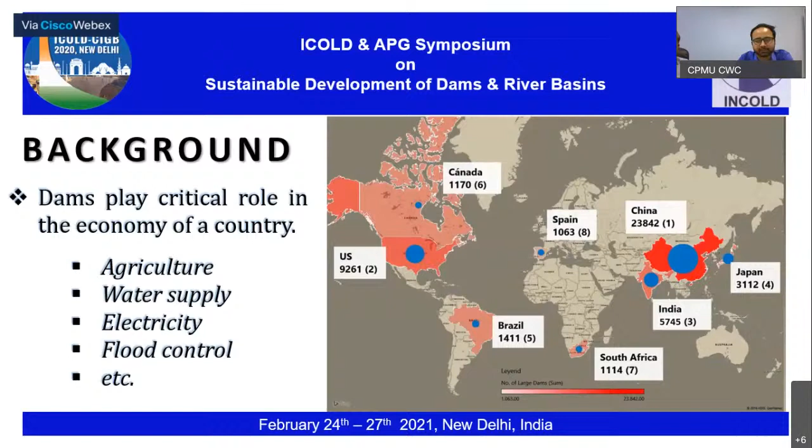From the Indian perspective, if we see the age of the dams, of these 5,700 dams, more than 25 years of age accounts for about 4,180 dams, out of which about 1,200 dams are greater than 50 years of age. So in addition to this aging, deferred maintenance, and deficiency in design practices, our dams have been facing a multitude of dam safety issues like hydrological safety, structural safety, and operational safety.

Keeping this fact in view, this DRIP program was initiated in the year 2012, as sir already told, in which the portfolio of 223 dams are there, and in this portfolio 89% are older than 25 years and 25% older than 50 years of age.

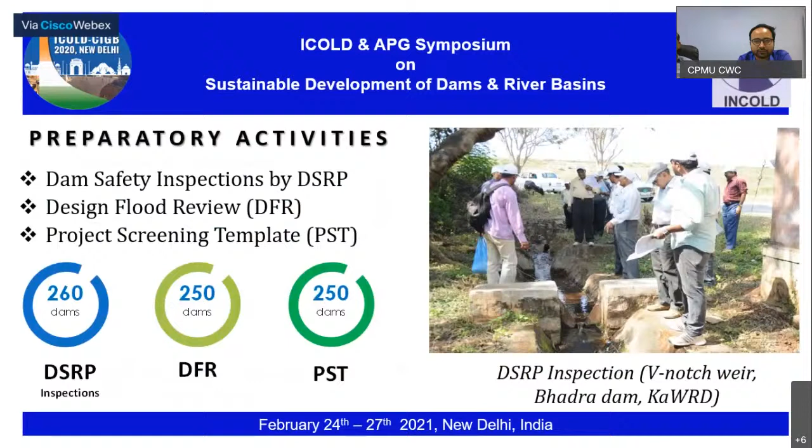These are some of our observations while carrying out the design flood review of 203 dams. Why 203 dams? Because some of them are saddle dams and have a common reservoir. We have observed that about 33, or 16%, of dams have no increase in design flood, and about 54% have less than 0 to 50% increase.

And 47 dams have 50 to 100% increase. Based on the design flood, we did the flood routing studies also, and we found that more than 51% of the dams have no sufficient freeboard availability.

To address this in a very holistic manner, this design flood review, and accordingly the ability of the dam to cater to dam safety, we carried out the hydrological safety activities like raising of dam height, parapet wall, additional spillway, desiltation of reservoir, and repair of spillway and conveyance system. So this we did for 171 dams.

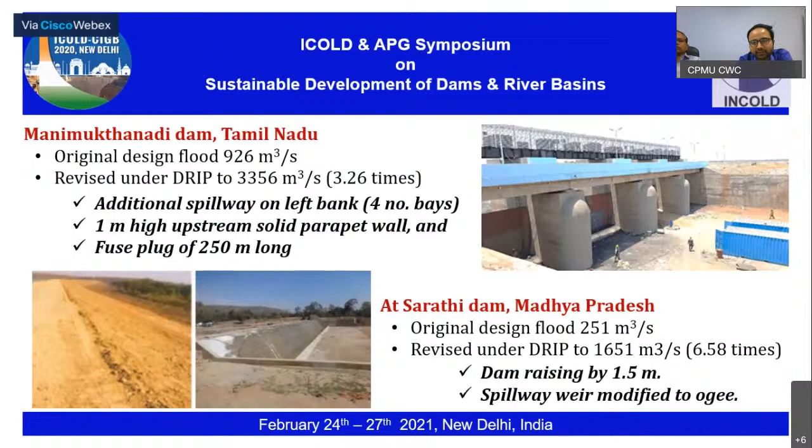Now, coming to the stability aspect, we did it for 164 dams, which included backing concrete, embankment and slope protection, dam resectioning, and etc.

In the seepage control, work was done for 71 dams, out of which joint treatment and grouting and geomembrane is the major activity which we did for addressing the seepage issues.

These are some of the examples, like Porthimund Dam in Tamil Nadu and Servalar Dam in Tamil Nadu. We did upstream face racking and pointing in Porthimund Dam, and at Servalar Dam we did the geomembrane and also raking and pointing at the joint treatment for addressing the seepage issue.

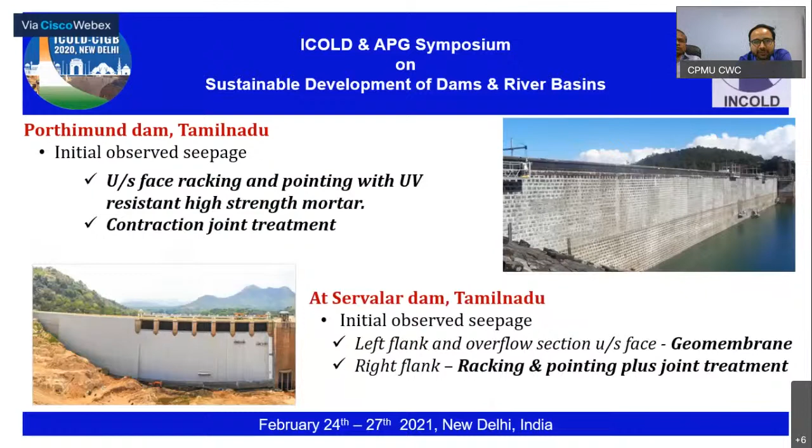In addition to this physical rehabilitation, we also looked into improving basic facilities like public facility, providing standby generators, gallery lighting, and surveillance equipment, instrumentation, and all. So this was done for 178 dams.

Third-party construction supervision and quality control is considered very important for ensuring high quality of works and also ensuring compliance to the contractual requirements. Under DRIP, we have 3 levels of third-party construction supervision. The first is looked after by the contractor who does the execution. Second is looked after by the SPMU who look after day-to-day activity, and third is from the central project management unit who are supported by the team of consultants.

In these 9 years, we did about 1,092 construction site visits. If you can see, in 2017 it was the highest because the project picked up during those years. And we also did some quality control testing, material testing for 605 numbers of samples.

In addition to physical rehabilitation activity, we are also doing some soft activities like preparation of emergency action plan and operation and maintenance manual. Globally, these two protocols are very important, especially before the initial filling of reservoirs.

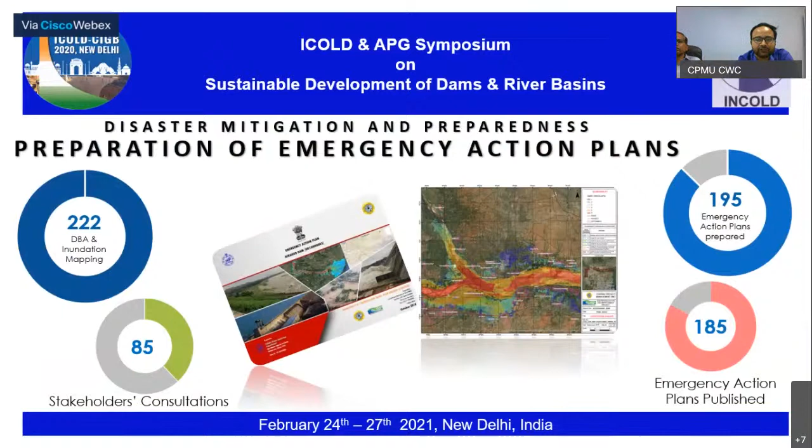Operation and maintenance constitutes two things: operation part and maintenance part. Under this DRIP, 203 manuals have already been prepared and 146 have been published. We also provided support to the states for preparing model documents, like the operation and maintenance manual for Maithon Dam and for Almatti Dam.

Guidelines and manuals are considered important pillars in dam safety management. Every state has different dam safety practices, so as the central agency or central project management unit, for standardization and uniformity, we prepared these guidelines and manuals. Out of 14, we have already published 11.

DHARMA is a web-based dam asset management tool for capturing important dam health information for long-term sustainability. We have captured almost 5,000 dams' data, about 1,000 users are actively using this, and licenses have been issued to about 18 states.

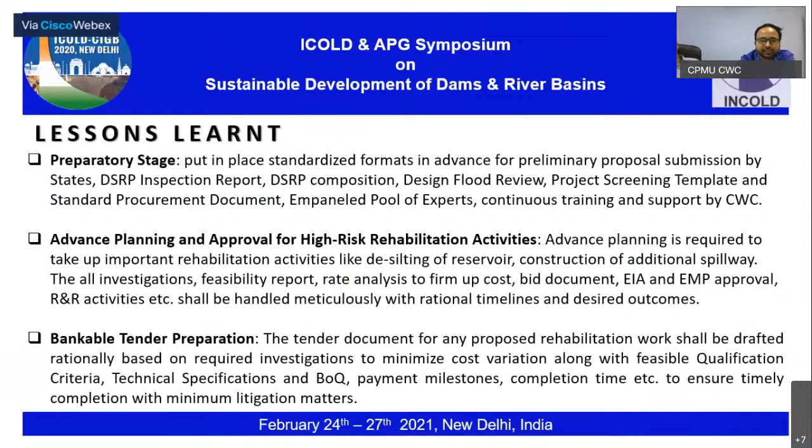Fourth is the CS and QA activities, which we are already doing in DRIP and also scaling up in DRIP phase 2. There's already a three-level CS and QA mechanism in place.

Fifth is the monitoring mechanism - each agency should have the right kind of monitoring mechanism so that activity can be monitored and corrective actions can be taken on a timely basis.

Sixth is adequate delegation of power. What we observed is that there is no adequate delegation of power in the states, so we recommend that there should be adequate delegation.

Seventh is resource identification and assignment, because in high-end technical activities like dam break analysis and inundation mapping, dam owners are not having enough capability. So we should have a competent technical group of expertise and training activity for these things.

Contract management experience includes dealing with contract management - we shall have adequate experience of contract management, otherwise it will invite matters related to undue delay in the technical and financial evaluation of the contract award.

We should also have appropriate capacity building, and all agencies must give due weightage to various kinds of trainings for their staff and officials.

The last point is quality human resources in the State Project Management Unit, because SPMUs are the single window arrangement at state level. They must have competent officials with an adequate number of years of service left before retirement, so that they can carry forward the institutional memory to ensure implementation of the scheme.

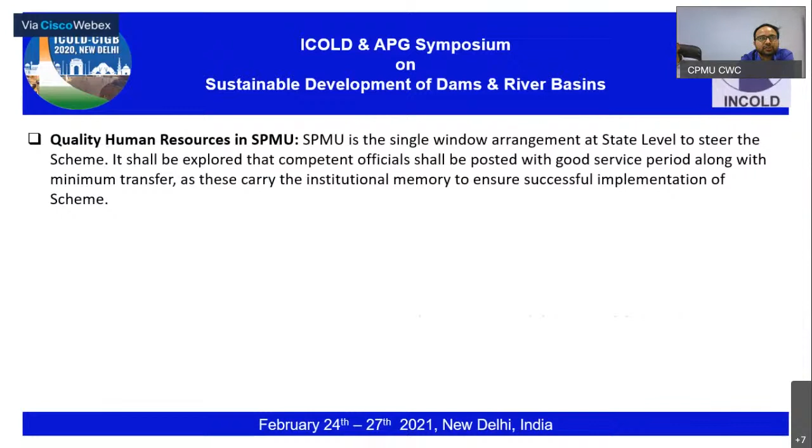With this, I want to thank the chair.

Yes, Sarab, I think - so listening currently. Okay. Yes.

I just wanted to mention that the presentation was very comprehensive, and probably when you put all that together from outside your day-by-day activities, you should feel impressed with yourselves. The world, as I have talked about, is looking at your example, particularly in the region, but not only there. You are putting forward a path that the world will really appreciate. Let me check the chat if there's a direct question - I don't see one, but if not, I would like both of you, or whoever wants, to respond.

Beyond the statistics, what makes you most proud of what you have done till today? If you had to name one thing from what you have achieved, what is it that makes you proud?

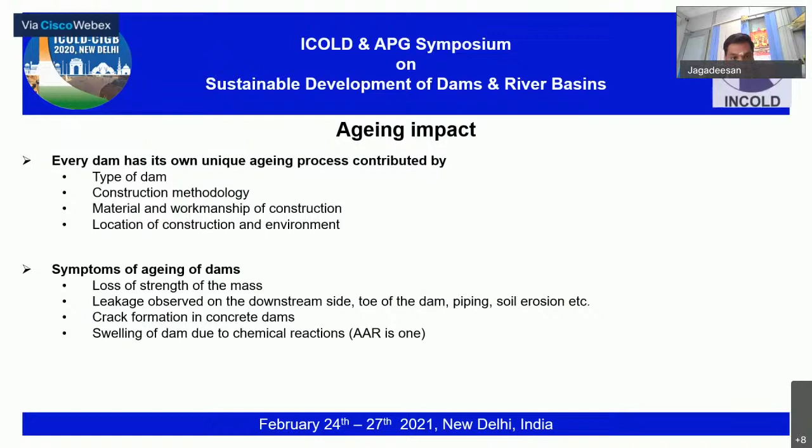So let's quickly get into what a geomembrane is. Geomembranes are nothing but a thin flexible material with very low permeability. They are highly flexible, durable, and provide efficient water tightness, and are able to accommodate settlements.

They can elongate with earthquake movements, and they can be installed quickly even underwater - that is a very important aspect. It is completely environment friendly, easily monitored, with no maintenance or less maintenance. It increases the longevity of hydraulic structures, thereby increasing the safety of the entire environment. And finally, when effectively designed, it is completely cost effective.

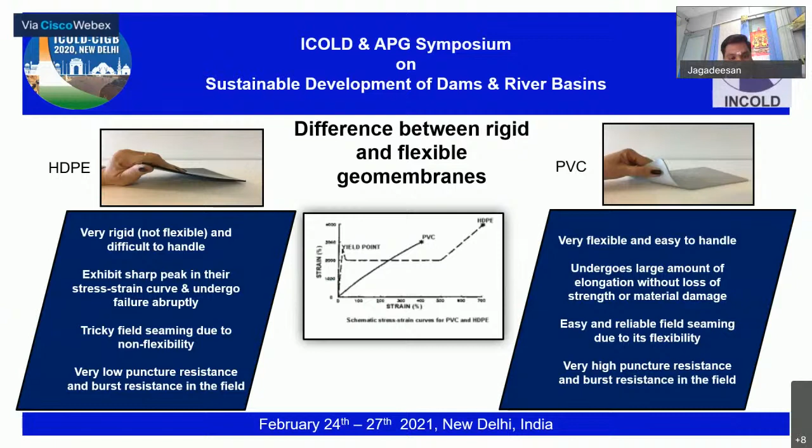Field seaming is very tricky in HDPE, whereas it is very easy for PVC membrane. HDPE has very low puncture resistance and burst resistance in the field, whereas PVC membrane has very high puncture resistance and burst resistance in the field. These are various parameters which help us design why PVC is the most preferred in hydraulic applications.

We will quickly get into three case studies of experience in India. First is the Kadamparai Dam, second is the Servalar Dam - thanks to DRIP for giving us this first dam project in India - and the second DRIP project is Upper Bhavani Dam.

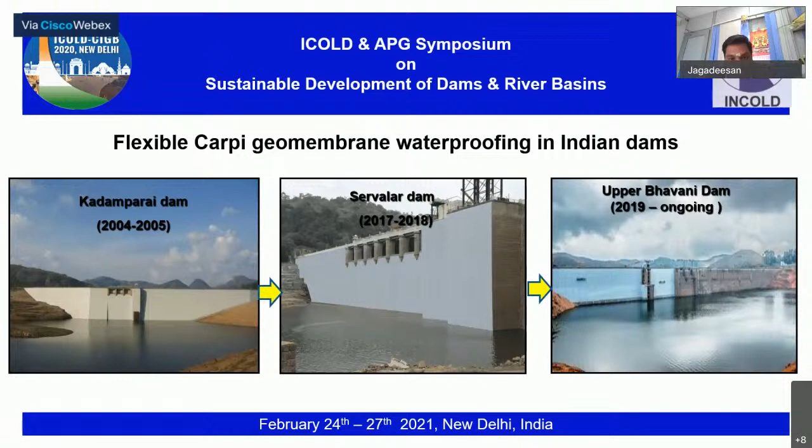So first case study, Kadamparai Dam. It's a stone masonry dam owned by TANGEDCO, and this is the first dam to be rehabilitated with PVC membrane in India. Quickly into the history of Kadamparai Dam: it's a stone masonry dam of 67 meters high, 478 meters length, completed in 1984, and it is a pump storage scheme of 400 megawatts.

The problem with this dam is, since its first impoundment, there was seepage experienced of 1120 LPM recorded in the first impoundment. The problem continued, and the seepage inside the gallery kept increasing well beyond the permissible limit. At one point the dam owner could not fill the dam beyond 70% of the FRL, and they were losing huge amounts of power generation - less than 220 megawatt was being generated - because they had a fear that the dam could lead to serious consequences if filled beyond 70% of the FRL level.

And you can see the water that is gushing inside the gallery. The client also did not leave it as it was.

They did try a lot of repair methods that were very much prevalent at that point of time. From 1990s, they tried drilling and grouting, packing at several locations, and racking of the joints with cement, filling it with cement mortar. But unfortunately, all these efforts gave them only a short-term solution of 2 or 3 years, and the leakage kept on increasing.

In 2003, the leakage touched a point of 38,000 LPM, and that was only through the gallery, at almost 10 meters below the FRL level.

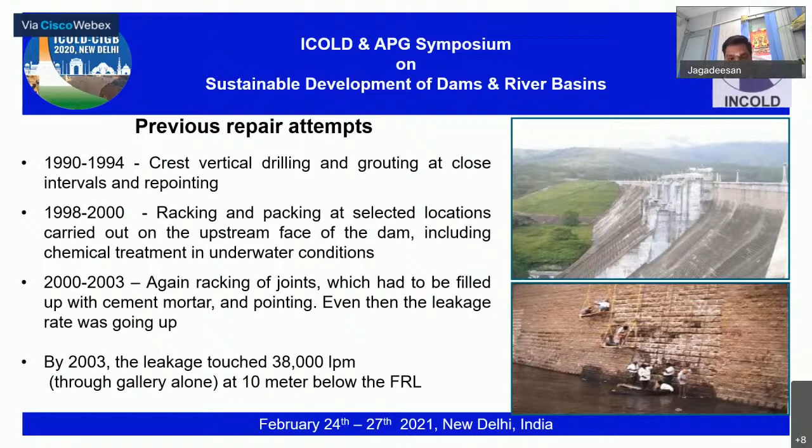It was at this point the client had got in touch with Carpi through some international conferences. Carpi made a site visit and proposed a solution, which was immediately accepted by the client. It all happened in a very short span of 6 months, and finally Carpi took over the site in 2004, and we started with the preparatory works.

Installation was performed from special traveling platforms, and the geomembrane work started in the middle of January 2005.

Let's get into the technical aspects. A geomembrane waterproofing system doesn't end up with a single material geocomposite. There are so many elements that define the system, and that is why we always call it a waterproofing system and not a material. There is an anti-puncture layer called a geotextile, a drainage layer called a geonet, an anchorage element we call the tensioning profile, and finally the geocomposite. All combined together is called a system.

A detailed section of the tensioning profile, which is a key element, is drawn over here. There are 3 major elements: a lower profile that is fixed to the dam body, a geomembrane that is rolled from top till bottom, and finally the upper profile.

This key element in fixation of the geomembrane is commonly available in the market, but the key lies in how you anchor and fix it to the dam surface, so that it lasts for the duration of the warranty as well as the life.

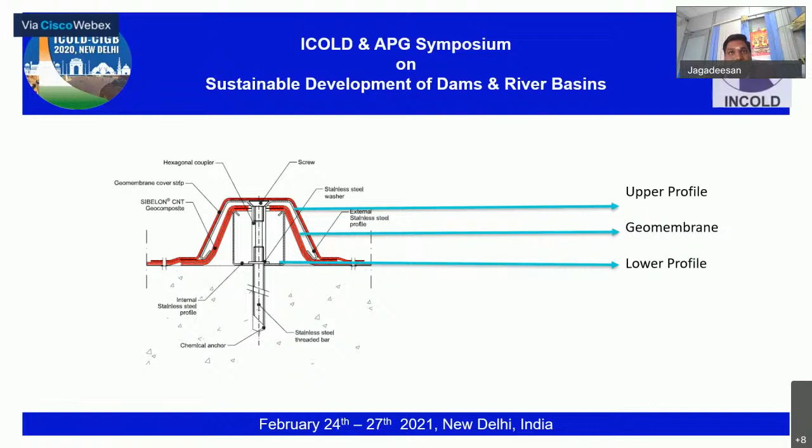Then a highly permeable, non-compressible geonet was placed along the perimeter seal to collect rainwater and convey it to the discharge point to the gallery. Then a thick layer of 2000 GSM geotextile is installed on the upstream face.

Kadamparai being a stone masonry dam, there are stone protrusions of more than 2 inches, and we have to make sure these protrusions do not disturb the geocomposite. So we went in for a thick geotextile layer installed from the top of the dam till the bottom.

One more important thing is, way back in 2004 itself, we conceptualized the instrumentation that is required, and that was the reason we installed optical fiber cable behind the geomembrane to monitor its efficiency even for multiple decades. The OFC cables are installed along the periphery, and the ends are taken to the crest and connected to dedicated boxes.

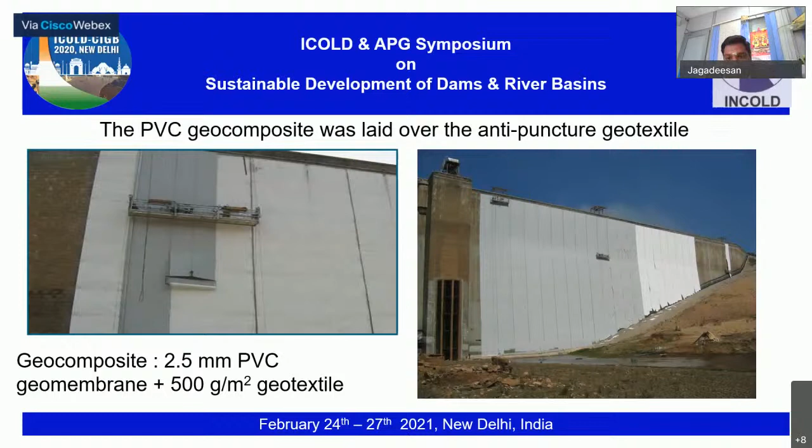Finally, after installation of the lower profile and the geotextile, comes the main element, the PVC geocomposite. The composite we use is a 2.5 mm PVC heat coupled with a 500 GSM geotextile. You can see the gray one that has been installed from the top of the dam till the bottom.

Then comes the next tensioning profile, the top profile. Once the lower profile is fixed, the geocomposite is rolled, and finally the top profile comes. After welding all the composite panels together, the external profiles are placed over the geocomposites and connected to the lower profiles. The tightening should be done so there is no excess tightness that tears the membrane, but at the same time it should not be too loose so it does not form wrinkles. That is where the experience of key technicians comes into picture.

And finally, after all the installation is completed, we terminated all these membranes at the bottom using a watertight perimeter seal. The watertight perimeter seal is covered using resins, gaskets, and bedding mortars. And this is the key element, that is how we discharge the water behind the membrane.

As I said earlier, the biggest plus of this system is this is the only waterproofing system which has a drainage layer incorporated, meaning if there is any kind of water entry inside the dam body, we ensure that the water is properly conveyed into the gallery and it does not allow entry into the downstream side or the body of the dam. So you can see these are the drainage discharge pipes that are installed from the upstream of the dam to the gallery.

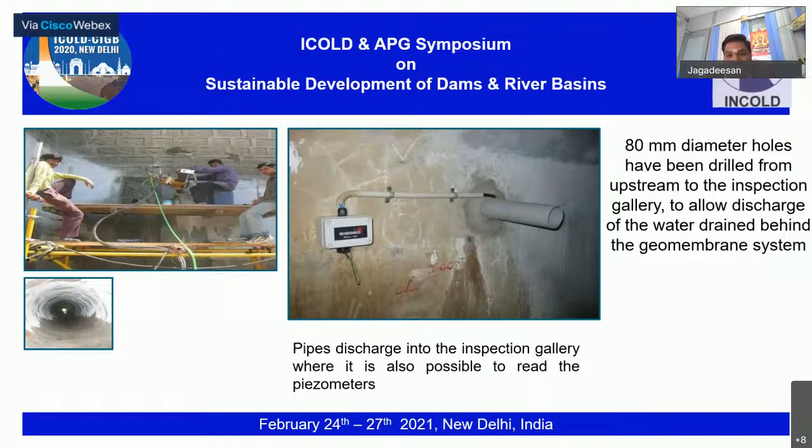Finally, the entire installation covering more than 17,000 square meters, including the monitoring system, was completed in 3 months, which was 6 weeks ahead of schedule. In fact, for the first time in the history of TANGEDCO, they had paid a compensation of 51,000 euros in 2003 for early completion and for handing over the dam much ahead of time, so that they could begin the generation ahead.

Finally, after all the installation, the entire dam leakage was brought down to 80 liters per minute, which is close to 99.8% reduction in leakage. You can see how the dam looks like before geomembrane and after geomembrane - a completely dry gallery.

And for the success of the project, Carpi was awarded the India Power Award in 2008. The award was received by our chairman, Mr. Alberto M. Scuero. This is a photograph of Kadamparai Dam taken in 2018, almost 13 years after the installation. Till now, the leakage is around 100 liters, which is marginally more than what we left, and which is still well below the permissible limit.

Let's quickly get into the next case study, that is the first dam project of DRIP, Servalar Dam. This is a stone masonry dam located in Tirunelveli district in Tamil Nadu. The dam also belongs to TANGEDCO, and has a multi-purpose functionality. Majority of the dam's purpose is for irrigation, and the power house is run based on the water needs on the downstream side.

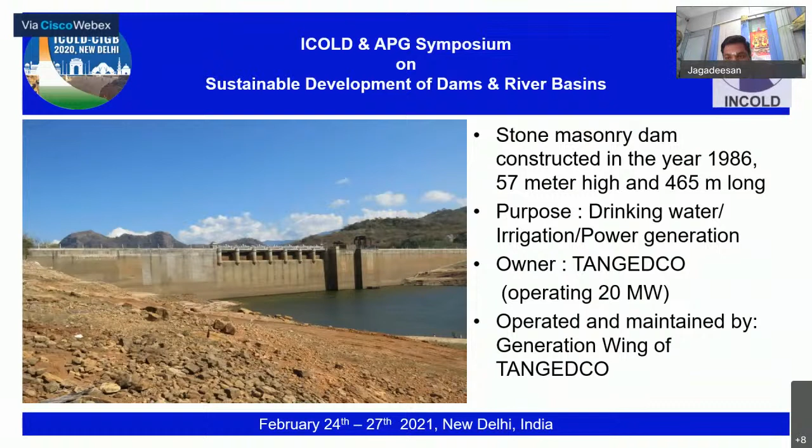The major purpose is drinking water and power generation only for a seasonal duration. This was also constructed in the year 1986. It's a 57-meter high dam and 465-meter long, and it is operated and maintained by TANGEDCO.

I have a video to run. I'm not sure if it runs over here. Okay, let me go to the video and then I'll get back again. Can you see the video running? No, we still see a gray screen. It looks like maybe now. No. Okay, just a minute. Jagadeesan, it's not running. You can, I think, tell salient facts to the audience. Okay. You're wasting your time. Okay, I'll go to the video at the end of the session. Maybe by then I'll be able to locate the problem. Can you see the screen now again?

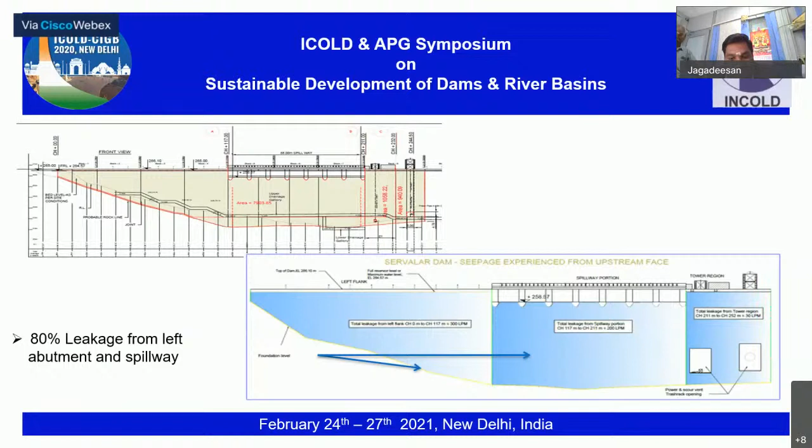When you talk about the challenges we faced during execution, the dam is located on a perennial river, which was a very, very challenging job, and we had to do a lot of desilting and dewatering works. Unfortunately, this dam region is located in a locality where it rains for almost 11 months out of 12 months. So you can imagine how difficult it was to do the desilting and dewatering works. The reason for doing desilting and dewatering works is we need to install the membrane as deep as possible, close to the foundation.

Another biggest challenge was the non-availability of as-built drawings, and unfortunately many dam owners do not have these as-built drawings, so there were a lot of surprises when we started excavating. There was a lot of delay in dam depletion, and there were several structures which were not in the drawing earlier.

This dam is located in a windy location, where wind speeds of up to 75 km per hour were blowing, and you can imagine the risk involved when installing the membrane. You can see the platforms that were installed and used.

I want to make a comparison between Kadamparai and Servolar. Kadamparai was the first project for Carpi, so we did not take any risk and imported all the materials. Now in Servalar we have become completely indigenized, and all the platforms are locally made.

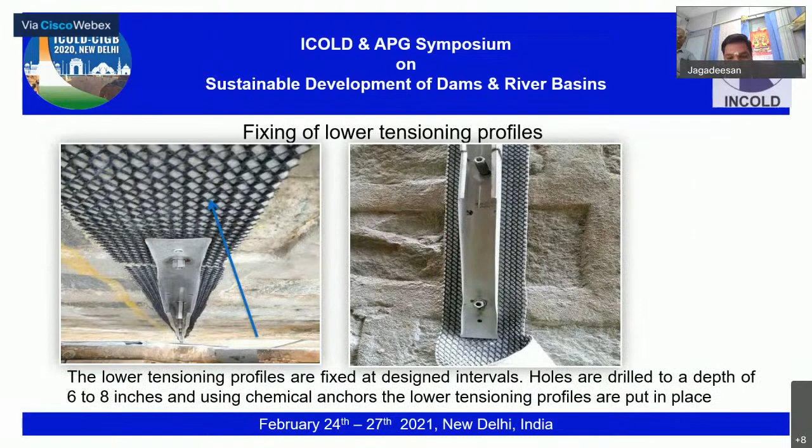We can see the geomembrane installation started in Servalar: fixation of the top seal, fixation of the lower tensioning profiles. They have been fixed at regular intervals, and holes are drilled to a depth of 6 to 8 inches using chemical anchors, and they are put in place.

Then a geotextile is applied. This is also stone masonry, and a lot of protrusions were observed, so we had to use a geotextile of 2000 GSM.

Then the geocomposite, which is 2.5 mm, was installed from the top of the dam. You can see on the left the geocomposite being rolled from the top, and the installers on the platform. Adjacent sheets of geocomposite, of 2.1 meter width, are rolled out, and the connections are joined by hot air seaming.

Once all the rolls are unrolled, there is a lower profile. For the upper profile, we don't leave any stainless steel exposed; we cover even the upper profile with a cover strip. So from the outside, it looks like a pure gray material lying there.

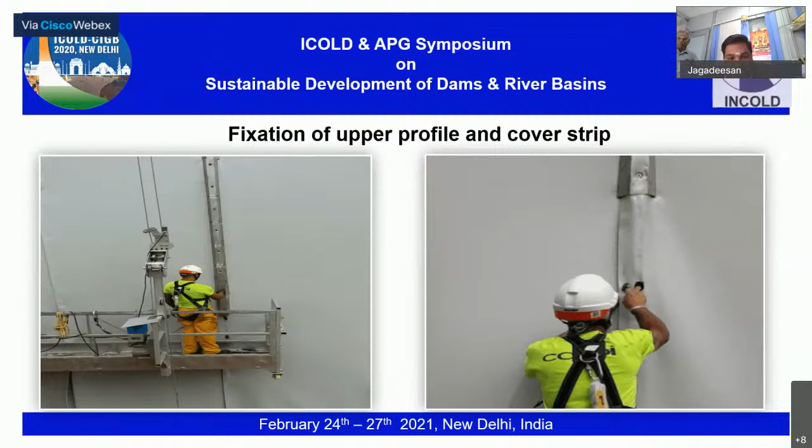Finally, a quality check is performed. You can see a seam check, torque check, and welding check being carried out.

After installation of the system, you can see the difference. Within one season, a completely wet downstream has become completely dry. You can see the drop in leakage — the leakage measured in the gallery was around 800, but the downstream leakage was never measured and was close to 4,000 to 5,000 liters. Now there is hardly any leakage.

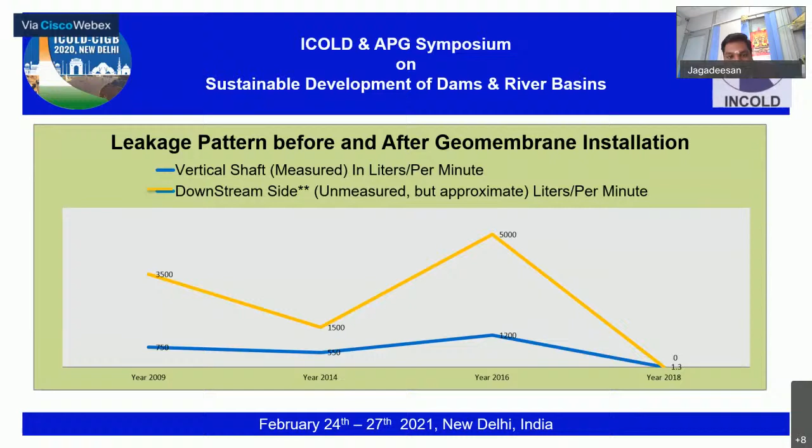Let's quickly cover this in another two minutes so I can wind up the presentation. The next job is currently in progress. We have completed almost 60% of it, and due to COVID the project had to be extended to this season. This is a very huge dam, 82 meters high and 426 meters long, and it's the second dam project under DRIP.

You can see this leakage is almost on par with Kadamparai. The leakage measured was around 8,000 liters at close to 9 meters below FRL level, and as per calculation, if it fills to the top level, the leakage would easily exceed 18,000 liters per minute. Unfortunately, this dam was declared a distress dam back in 2005, but the client could not take a decision on conclusive repair work, and finally DRIP came to the help of TANGEDCO.

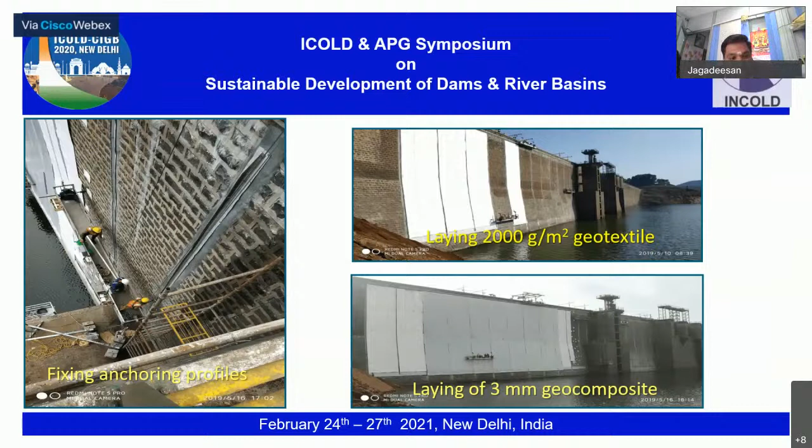The only difference between this and the previous projects is that since the head of water is high, we had to use a thicker geocomposite, 3 mm. One more additional element we included here is an optical fiber cable.

Like we did at Kadamparai Dam, the optical fiber cable was installed along the periphery of the dam behind the geocomposite. This is to monitor the performance of the geomembrane over decades. Since we give a life of 70 years, we need to ensure the performance of the geocomposite remains intact.

This is the protocol that Carpi follows in all our projects. This is a photograph of Upper Bhavani Dam after completion of the first two phases. The third phase is in progress, and hopefully by June we should be able to complete the entire work.

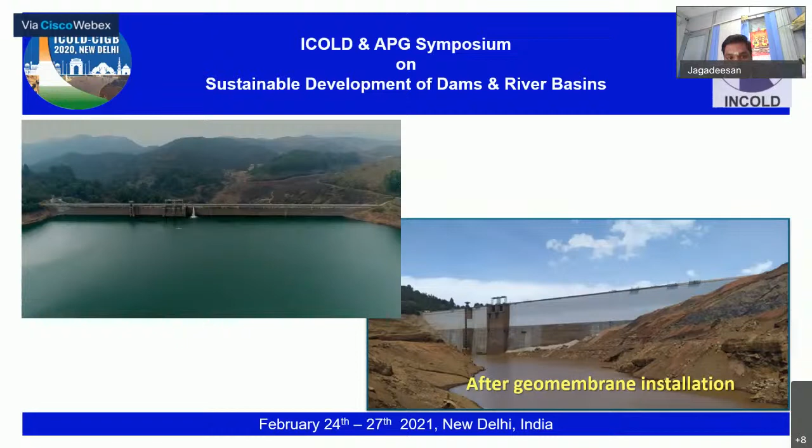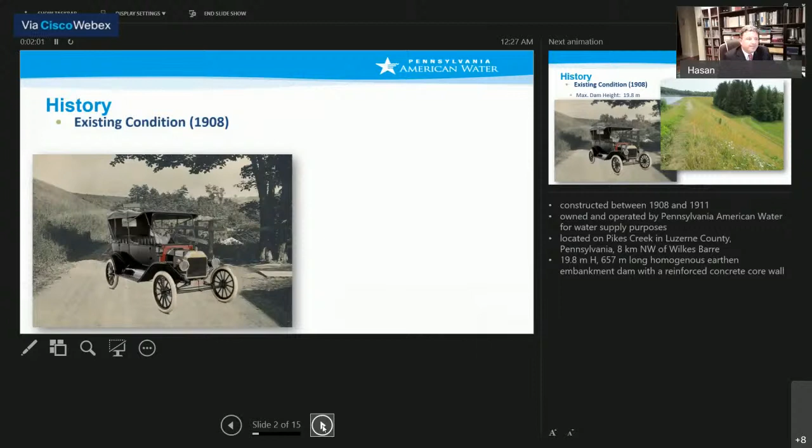The dam is composed of a homogeneous embankment, which is 657 meters long and about 20 meters tall, and there is a reinforced concrete core wall in the middle.

Here we can see some additional photos. The dam has upstream and downstream slopes of 2 to 1.

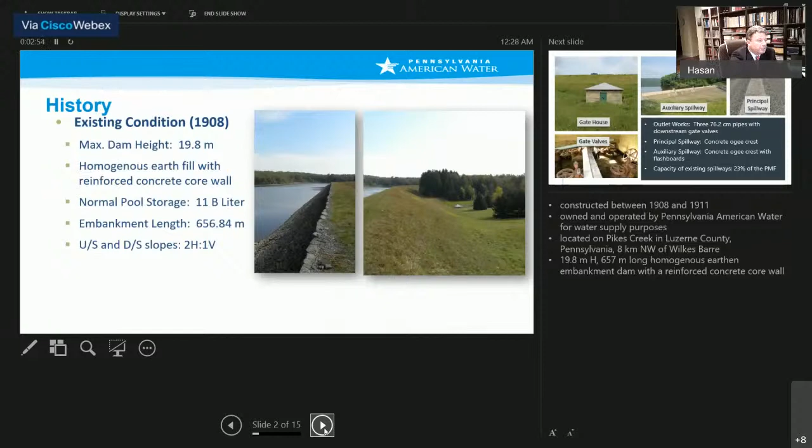And here are some information about the other structures of the dam. We have the outlet works, which is composed of 3 pipes having a diameter of 76.2 centimeters, and it also includes downstream gate valves. The principal spillway is a concrete ogee free overflow spillway, and the auxiliary spillway, which you can see in the middle of the photo, is also a free overflow spillway. There is an ogee crest, and there were steel flashboards, which open manually when there is a major flood. The capacity of both of the spillways was 23% of the PMF.

And the problem with the dam was that it's located in an area where there are a lot of people living downstream, and failure of this dam would cause significant economic damages and also loss of life. So after evaluation of the hydrology, it was decided that the design flood requirement had to be full PMF, so we needed to increase the capacity of the spillways.

And while doing that, we had some requirements. We couldn't, for example, increase the dam embankment. We couldn't increase the maximum water level. We couldn't increase the outflows up to 100-year floods because there are many structures at the downstream of the dam. Since this is the water supply dam, we can see the office buildings as well as the water treatment plants at the downstream.

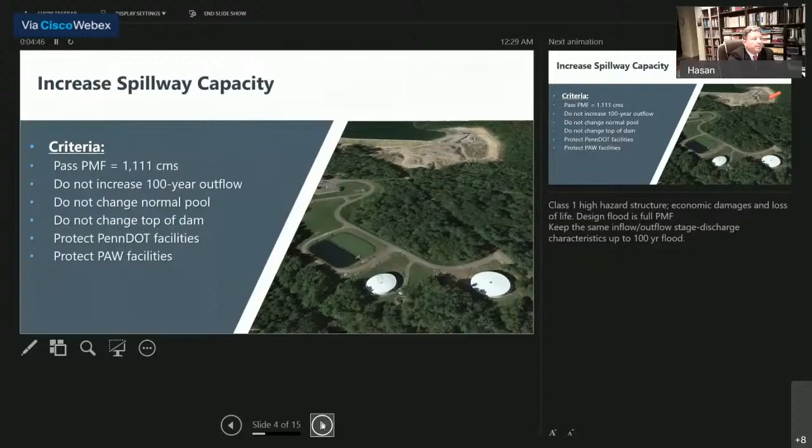We also have a bridge that is connected to, that is under the highway that is running nearby. So we had to protect all these structures while rehabilitating this dam in order to meet the new PMF requirement.

So we see all these structures. For the rehabilitation works, we couldn't do any widening on the main spillway because it was difficult to do any modifications with the topography, and also it wasn't possible to make major changes at the road downstream as well as the bridge.

Some repairs had to be done on the spillway because there were a lot of concrete damages at the base, at the chute, which had to be repaired. Also during a high flow, the water was overspilling from the left side of the wall, which had to be raised. So at the end, the majority of the rehabilitation was focusing on the auxiliary spillway.

We had to increase the capacity from 392 CMS to about 1100 CMS.

So in order to do the rehabilitation, there were several alternatives developed. To start with, it wasn't possible to consider flashboards and earthen fuse plugs, which are not allowed in the state of Pennsylvania by the Dam Safety Regulatory Agency because of reliability issues. Also using mechanical gates were not encouraged because it requires human intervention. There are mechanical and electrical systems involved, which might fail during very large floods, and also a potential for misoperation during very large floods.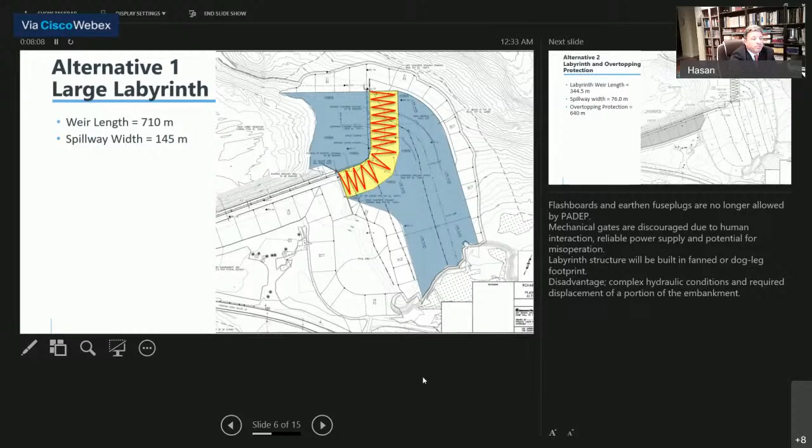So this alternative had a lot of disadvantages. First of all, you don't want to mess with the existing dam embankment. It's not an ideal situation to try to take some space from there, which also causes the project to be very expensive. And for the routing of the flood, this alternative also created a lot of complex hydraulic conditions. So this alternative was eliminated.

The second alternative was keeping the same footprint of the spillway and constructing another fixed labyrinth weir, which would pass about 50% of the PMF. And then the remaining 50% of the PMF would go through the dam embankment by creating an RCC or similar system for doing overtopping protection.

So reminding you about the dam embankment, it's a 640 meters long structure. So basically you're trying to create a spillway throughout this entire dam embankment. The flood will be discharged not only through the spillway, but also through the entire dam embankment.

So this alternative was also eliminated because of the costly and, most importantly, hydraulic constraints, because you couldn't discharge all that water, which would inundate the downstream roads.

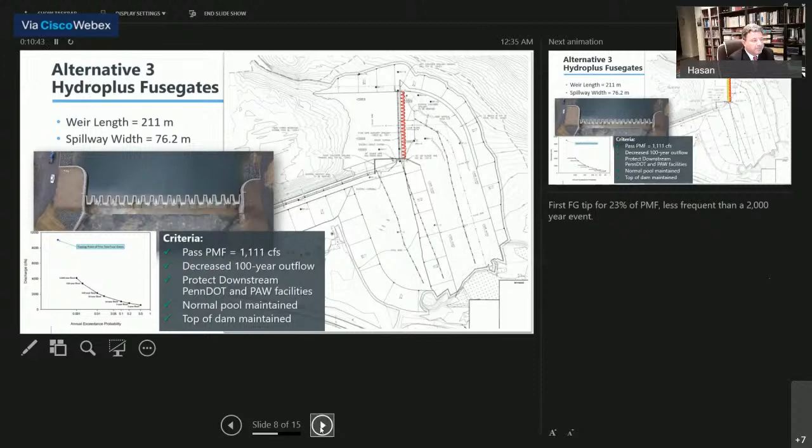So for those of you who are not familiar with the Fusegate system, here is some information. Fuse gates are freestanding blocks made of steel or concrete set on a spillway sill, and they form a watertight barrier. We put these gates side by side on a broad crested weir, and put EPDM seals in between, and also between the spillway sill and the fuse gates, in order to create a watertight barrier.

When there is an exceptional flood, which we can predict, because each inlet well of the fuse gates is set at a different elevation designed in the beginning, when the water level reaches this elevation, it will start filling the inlet well and fill up the chamber. At this point, the discharge capacity of the drain hole is not able to cope with all the incoming flows.

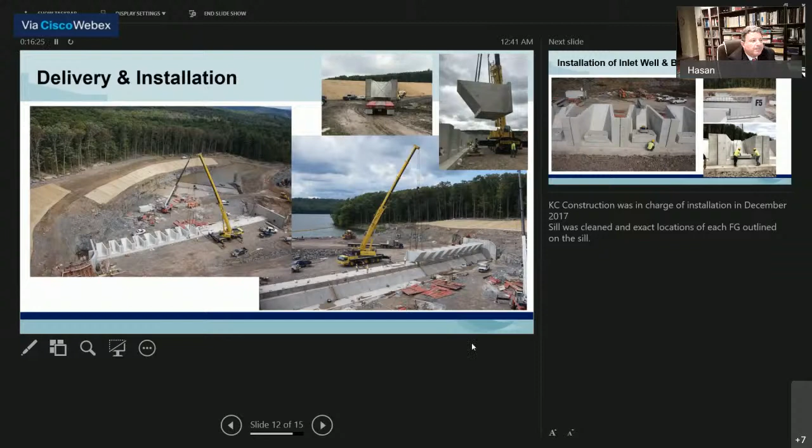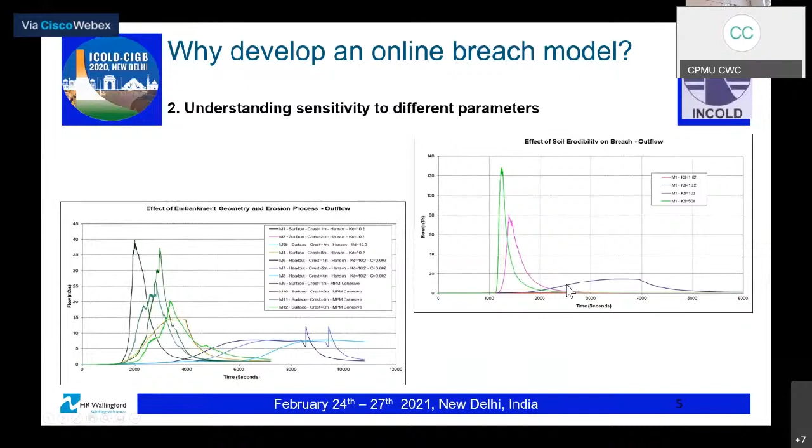So it's important to understand when and how these processes occur. Understanding the sensitivity of breach prediction to different parameters, such as your dam or levee geometry, or your soil erodibility, is equally important. The plot on the right here shows different hydrographs that could occur for a simple homogeneous structure with different types of soil. And finally, thinking about uncertainty and understanding that it's present, and the magnitude of uncertainty in relation to the end application is particularly important. Some end users, it will not be so significant, but for others, it could be very significant. So users should understand why they're doing the prediction and how their data will be subsequently used.

The model integrates analysis of hydraulics and erosion and structure response. It aims for a similar level of complexity in its analysis of these different aspects to give you the overall breach prediction. So the EMBREA model is not calibrated to specific data, so it does not reproduce a specific example or case study, but it is validated against a wide range of data so that its performance falls within a range for a variety of different structure types and scenarios.

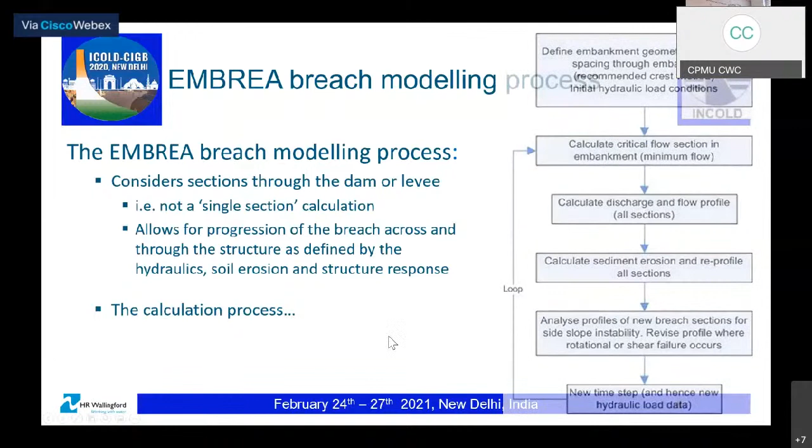I mentioned that the model checks section by section and looks at side slope stability and block failure. It does this by considering the erosion around the section through the breach, and then considers block instability at each time step for rotational block failure or shear slip failure.

If you have a core to your dam or levee, it looks at the stability of this in a similar way. As the supporting fill material is eroded and the core becomes more exposed, it checks to see when failure may occur with that core.

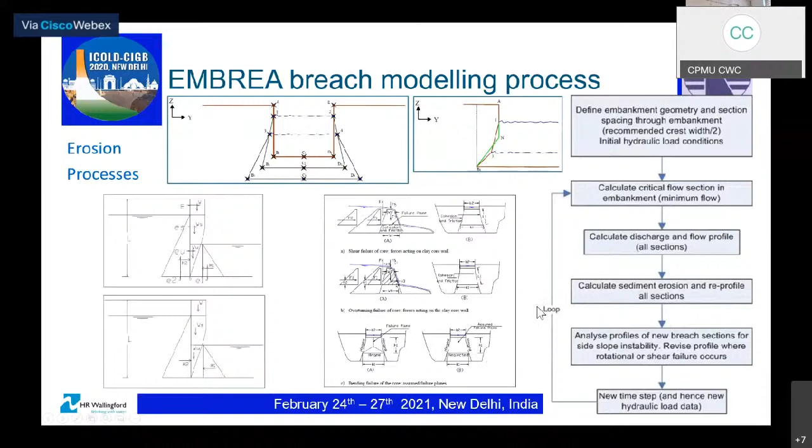So how does EMBREA Web differ from EMBREA? It's not different—it's simply an online version of the EMBREA model. Because it's an online version, the simulation takes place on a server based at HR Wallingford in the UK, so no software download is required.

To gain access, you need to register, and then there are two versions you can use: EMBREA Lite, which has free access as a free version, or EMBREA Pro, which has more functionality and paid access.

If you wish to access those models, the web address is shown there, and you have a choice of these two options. I've got a slide later on which goes into more detail about the differences between EMBREA Pro and EMBREA Lite, so we'll come back to that.

What do you find when you log in? First of all, this is the EMBREA Pro homepage. You'll see various data entry screens, and on the far right-hand side, the settings screen.

If you go to the settings screen, this allows you to load previous files or to save setup files so that you don't have to re-enter the data every time.

If we then work through data sheet by data sheet, under the failure sheet you get to choose whether it's overtopping, head cut, or piping. You can define your structure type as homogeneous, layered, or a core structure with spillways and outlets, with downstream face protection and so on.

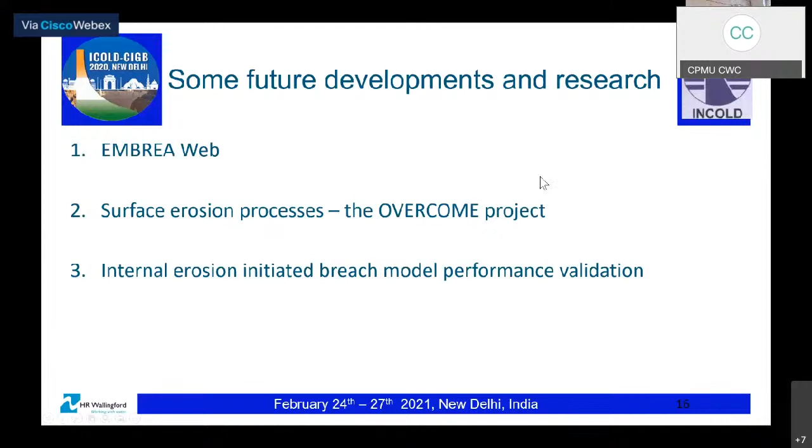Okay, so that was a quick overview of EMBREA, EMBREA Lite, and EMBREA Pro. To wrap up, I've got some slides on future developments and research related to the model. Fundamentally, we've continued over the last two decades to implement various research projects to improve our understanding of breaching processes, and that knowledge then feeds into the models.

So we will continue to update the functionality of EMBREA as the knowledge continues to evolve and advance. In the near future, we expect to update the user interface by simplifying it, and we also expect to include erosion below foundation level as an added functionality. In the long term, we intend to add guidance on soil erodibility and updated guidance on transitions between head cut and surface erosion, and when to use each of these different processes.

So then two final projects to wrap up. One is the Overcome project. This is the creation of a field test facility, large-scale breach tests in Spain. The project has a combination of laboratory tests, field tests, and numerical analysis. The laboratory tests are undertaken at UPM in Madrid to a scale of 1 meter, and the field test facility allows tests to a scale of 2.5 meter full section profiles. The objective here is to investigate both macro erosion processes and micro erosion processes.

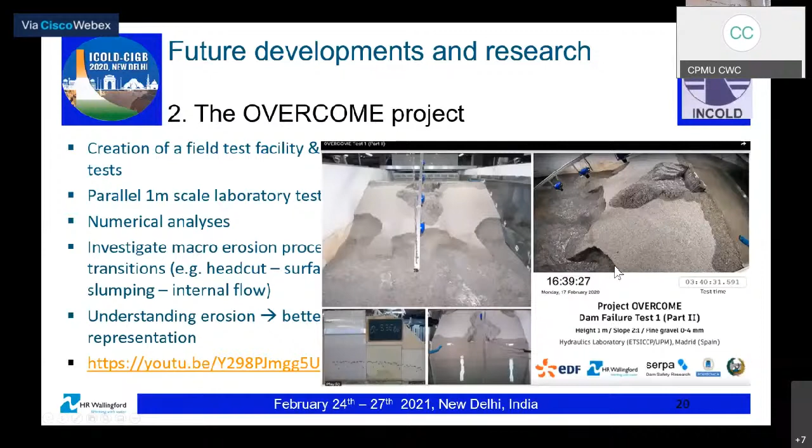The final project I want to mention is EDF-funded work looking at internal erosion initiated breach models. We're comparing, in much the same way as we did for the Dam Safety Interest Group breach modeling project, the performance of different models to predict breach that's initiated through internal erosion. Models being compared include AREBA, DL Breach, EMBREA, RUPRO, WinDAM, Ava Breach, with multiple modelers from different organizations around the world.

We have a two-year program here comparing the performance of these different models against each other, both blind and aware modeling, to help distinguish between model and modeler effects.

So thank you for the time. That was a very quick overview of our breach work. If you have any other questions, please do not hesitate to contact myself, Mark Morris, or my colleague, Mohammed Hassan. Thank you.

Thank you, fellow, for putting the presentation. If anyone wishes to ask any question for Mr. Hassan, the floor is open for a few minutes. Since the chair fellow is not back from the panel session, Mr. Hassan, can we discuss some points, since I didn't see any question from the participants? Can you throw some light on these breach models? Is it one-dimensional, two-dimensional, three-dimensional modeling capability, or is it only one-dimensional?

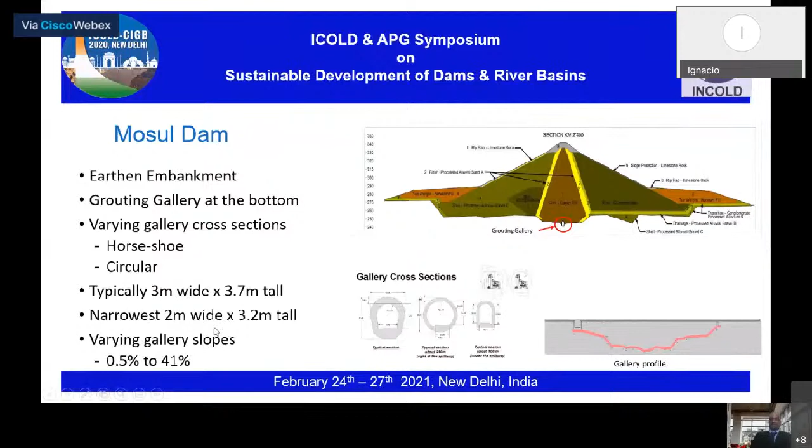The dam is an embankment dam and it has a grouting gallery at the bottom, which can be seen on the top picture, circled as grouting gallery. The gallery basically runs through along the geological formation, which can be seen right here. It follows the geological terrain. So the locations of the dam are pretty steep; it varies from 0.5% to 41% in slopes at places. And since the dam goes through multiple formations, the configuration and cross-section of the gallery is not the same across the board. It varies from circular to horseshoe shaped. Typically, it is around 3 meters wide and 3.7 meters tall, and in places it is as narrow as 2 meters wide and 3.2 meters tall.

So the Corps did a risk study post-ISIS, after the stalling of operations and maintenance on this dam, and determined that an emergency grouting program needed to be taken up. Some key objectives were established, to be accomplished in multiple phases. In phase 1, a continuous single grout line across the dam was to be established. The grout holes were to be advanced to a depth of 50 meters below the gallery floor to stabilize the immediate foundation of the dam. During this process, some open holes were found, open not because of karstic formation but because they were not grouted properly previously, and that led to extending the grout depth during phase 1. Complete stage grouting of all the holes is part of the phase 1 objective.

In phase 2, a second grout line was established. The first phase was to do a continuous grout line along the downstream alignment of the gallery, and the second phase is to do the upstream alignment, and if possible install a third line between the upstream and downstream in the middle. One of the objectives is also to train and integrate the Ministry of Water Resource staff to be proficient with the drilling and grouting program.

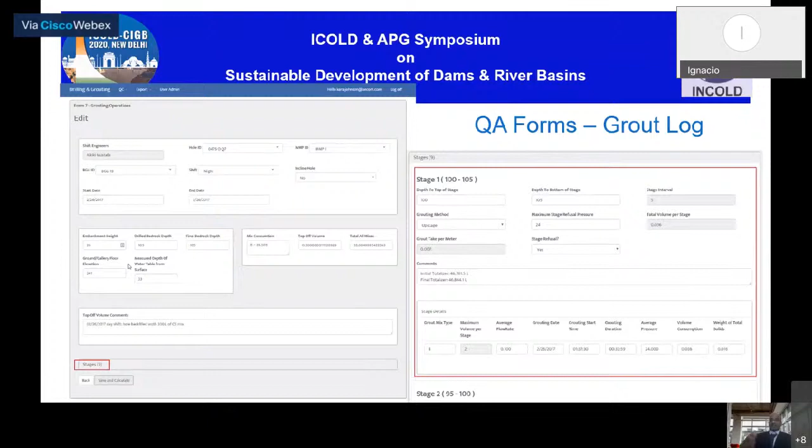The form on the right gives you a detail of each stage: how much quantity of a particular mix went into it, what the methodology was, and any issues identified during the grouting, documented on the second screen. So multiple stages of information flow into one particular hole, and that becomes one complete record.

For data synchronization, the entire Mosul Dam was equipped with fiber optic cables, and Wi-Fi hotspots were established across the dam. The tablets were connected to Wi-Fi, and one-way secure synchronization was done from the field tablet to the local Mosul server, through which the data flowed back to US servers, where it was processed and published on the SharePoint site the next business day, and also made available through a web portal.

If someone picked up the tab of QCing that form, it is picked up in the QC, and once complete, the status changes to complete and finalized. So this is how data can be represented.

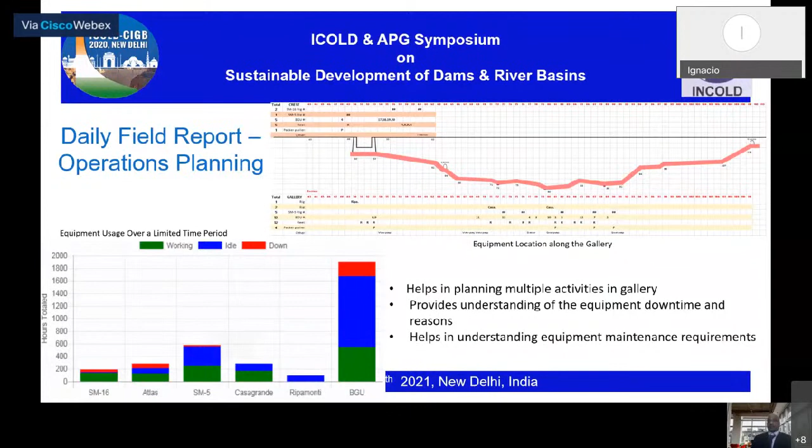The field reporting and operations planning, as shown in the lower left-hand graphic, tracks each drill rig by the number of hours it's been working, idle, and down, maybe due to equipment breakdown. The position of the drill rigs is also tracked, because this is a narrow gallery and equipment cannot pass each other, so it's important to efficiently position them at the proper locations.

In the turnover to phase 2, one objective was to train the local Iraqi personnel. As part of that, all the drilling and grouting material and the data management application was converted into guidance documents by marking up as shown on screen, and the Iraqi personnel were trained on how to use this for their own operations.

So finally, conclusions. The choice of drilling and grouting methodology was based on understanding the geology and documented challenges. Tracking the usage of drill rigs, drill bits, core barrels, packer sizes, grout reels, packer pullers, and other specialized equipment was made possible because of the data management application.

The choice of equipment and handling techniques were determined based on the challenges documented in the data management application. The choice of grout mix based on documented field conditions and challenges was also made possible because of the notes put into the application itself.

Real-time data collection certainly facilitated quick and easy decision making, which resulted in smoothing out the process and improving the results. Planning and sequencing of equipment was made possible only because of the data management application, because we were able to track every drill rig and every piece of equipment.

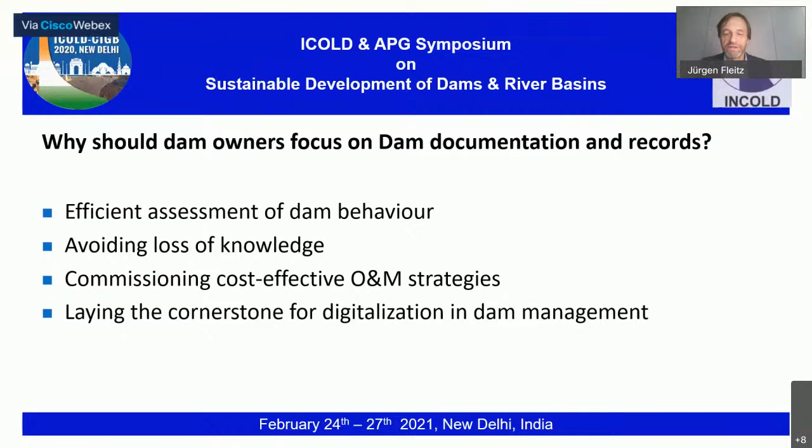It definitely will help you to be more efficient assessing the dam behavior. It avoids the loss of knowledge over time. It helps to put into practice cost-effective operation and maintenance strategies, and it lays the cornerstone for the need for digitalization also in dam management.

I'll give you an example of what can happen if you don't have a complete documentation and data set. This may lead to a lack of information, and also it's a source of uncertainty, and even lead to incorrect diagnosis, especially during emergencies like floods.

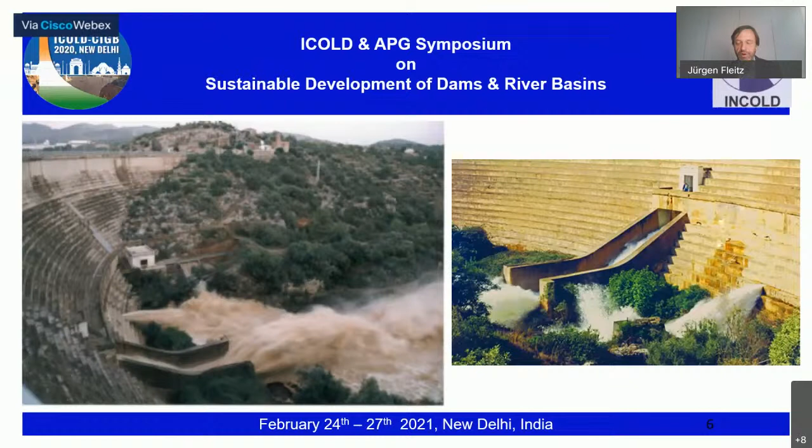Especially in the case of dams—and we learned this during the opening session of this symposium the other day, I was struck by the sentence that dams are built for life, for history—so for a very long lifespan, over decades and even centuries, I think it's especially important to conserve the data and transfer the knowledge from one generation to the next one. So a reliable data set is a key part in dam safety management.

This is especially important in the world of aging dams we are in. As you know, it's a huge challenge to face this aging process, to keep our dams safe and functional. Many large dams worldwide have already reached the 50-year age, which is usually considered initially for the design of our dams.

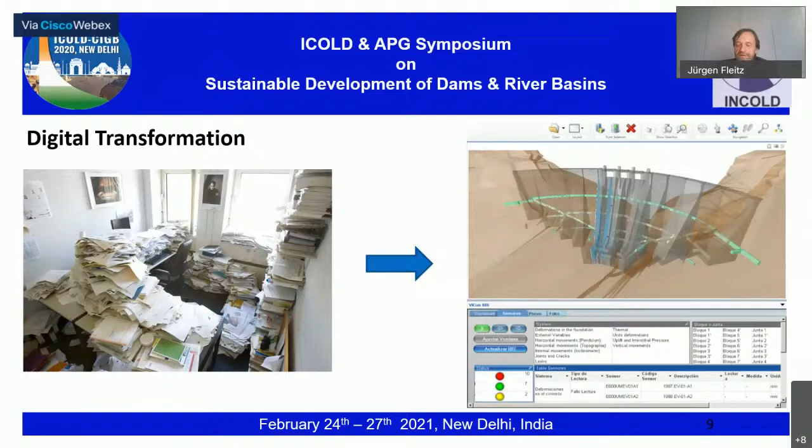Digital transformation, let me see if I can play this video.

Digital transformation is a process which is already present in many aspects of our life, and nobody doubts that it will keep advancing fast. Dams are no exception, and some dam owners have already started to use powerful tools such as building information modeling, BIM, not only for the design and construction of new dams, but also for improving operation and maintenance tasks of existing dams.

There are solutions that allow obtaining any information interactively, providing access to data and observations in real time. As an example, this online dam information system, ODIS, was developed by Ofiteco a few years ago in the framework of a research and development program.

The tool allows the use of 2D and 3D models, facilitating the scheduling and design of operation and maintenance activities, as well as inspection and monitoring tasks, and even performing cost studies and budget follow-ups, as well as linking different processes of a project.

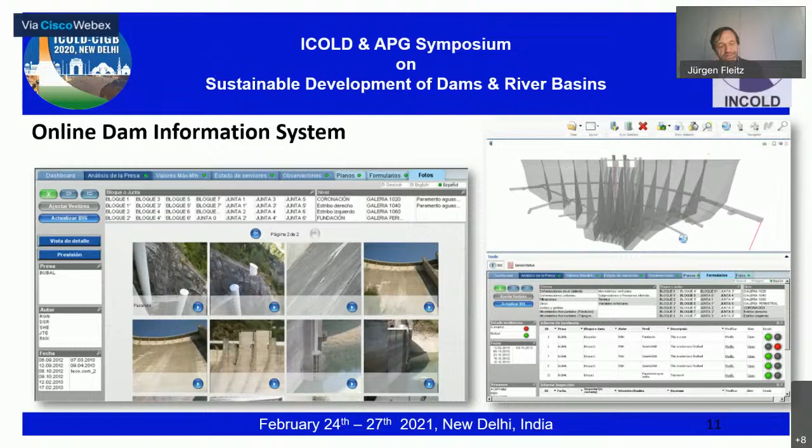We already started to use connected glasses, which is a previous step to virtual and even augmented reality. The fields of application are really very wide. It starts with remote assistance by experts that can assist you from any place in the world. It leads to a better performance of our operation and maintenance activities, and as we are more efficient, we can also save costs. It's especially important and useful to train personnel and to get them acquainted with our dam infrastructures.

So as a conclusion, in my opinion, the digital transformation of our society will not stop and will also extend further in the field of dams. Dam designers should pilot and steer this process. There are many advantages, as I tried to show in this presentation, helping to extend the safe and functional life of our dams. Let us push forward and lead as dam engineers this digital transformation before the IT industry takes over, and we, as dam engineers, just stay in the underpart.

So don't get me wrong, I don't want to displace the IT and financial managers, but it's still very important that dam engineers lead this process. But we should, of course, use these digital tools to support our good decision making. So let's go for Dams 4.0 in this digital transformation. And I thank you for your attention and will be happy to answer any questions if you have.

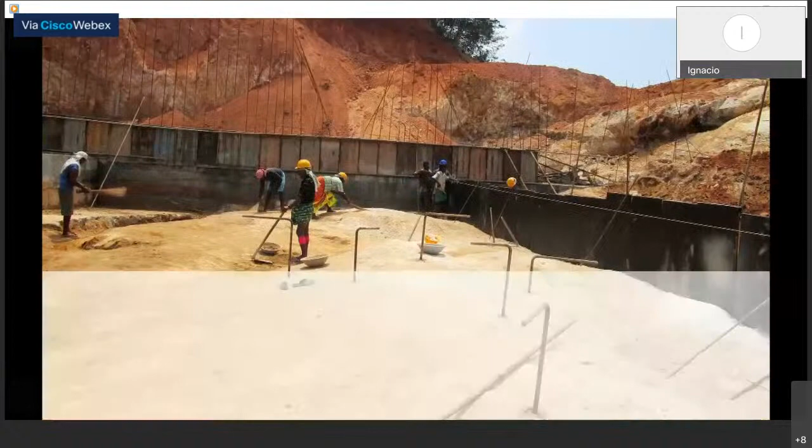Okay. Is it audible, Ignacio? Yes, I see it well. Okay, now it's starting. But we don't hear it. Really? Just a minute, something with the sound. We see it, but we don't hear it. Really? So I think the voice is not going through. I wonder if you could play it on your computer in a very loud mode, maybe we can hear it through your sharing screen system, I guess. Yeah, just a minute, just one second. Yeah, you're correct actually. Just give me one second. Is it audible now? No, we don't hear it, at least not in mine. Not in mine. Now. A little bit. Okay.

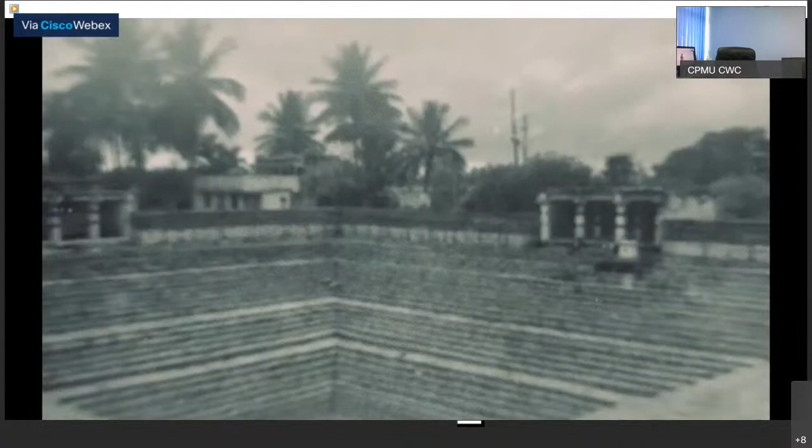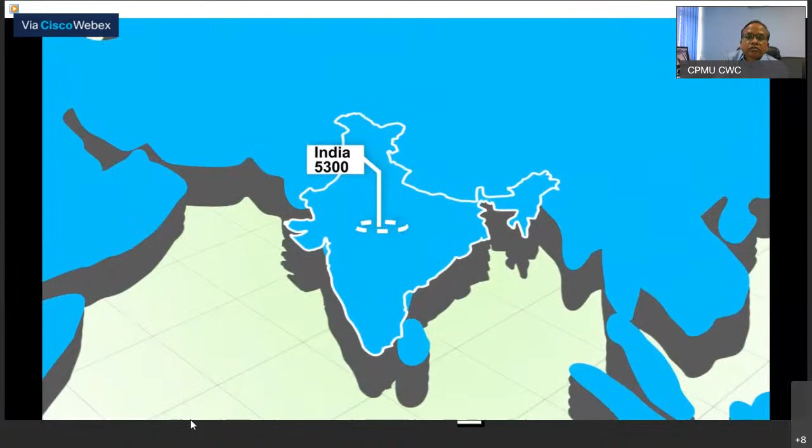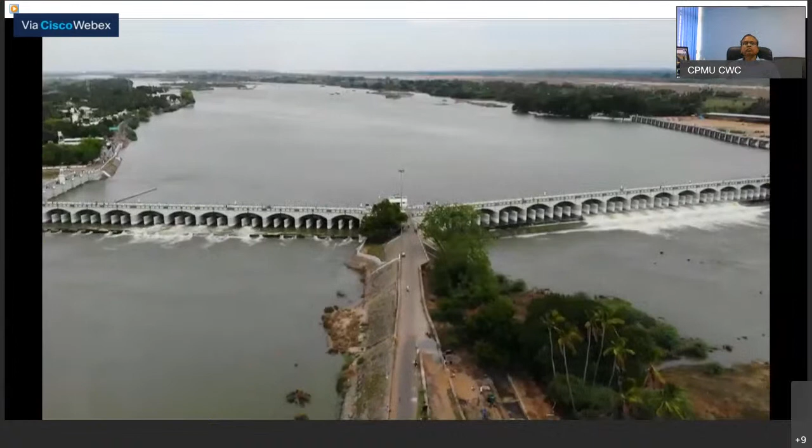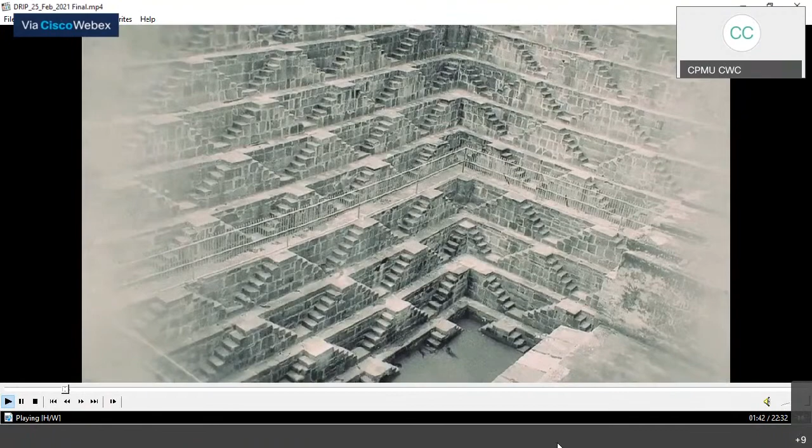India has about 18% of world population, but only 4% of utilizable water resources. So skewedness in demand and supply is reflected in various forms of water stress. In ancient times, numerous traditional ways were prevailing to meet local demands at a very small scale. Efficient water storage has been a part of city planning right from the times of ancient civilizations.

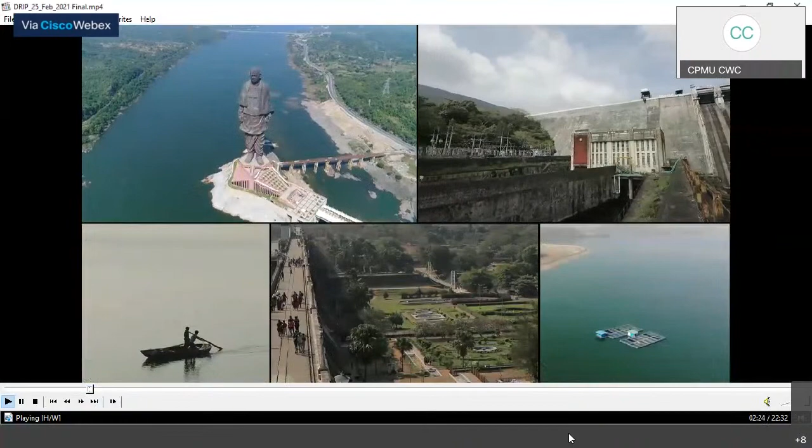The 20th century marked the era of large dams. In today's world, dams are a vital part of our society's critical water infrastructure, major components of a comprehensive strategy to address major challenges posed by drought, flooding, depleted aquifers, environmental needs, clean water, clean energy, and food security, among others. In addition to direct benefits, these also provide numerous indirect benefits to a nation.

As per the International Commission on Large Dams, about 58,000 large dams are in operation worldwide. India ranks third with more than 5,300 existing large dams. These water bodies store annually approximately 300 billion cubic meters of water. About 4,000 Indian dams are more than 25 years old, and 300 dams are more than 100 years old.

The Kallanai Dam, which was commissioned in the 1st century AD, is providing services to the nation for more than 2,000 years. It shows that it is often misunderstood that the average life expectancy of a dam is mere 50 to 100 years. These engineering marvels have been constructed with huge investment.

Long-term sustenance of these dams enables planned operational benefits from them. If a dam fails, it may cause loss of life, damage to property, and huge impact on environment. India experienced a few dam failures, the worst being the failure of Machhu-2 Dam in the year 1979 in Gujarat.

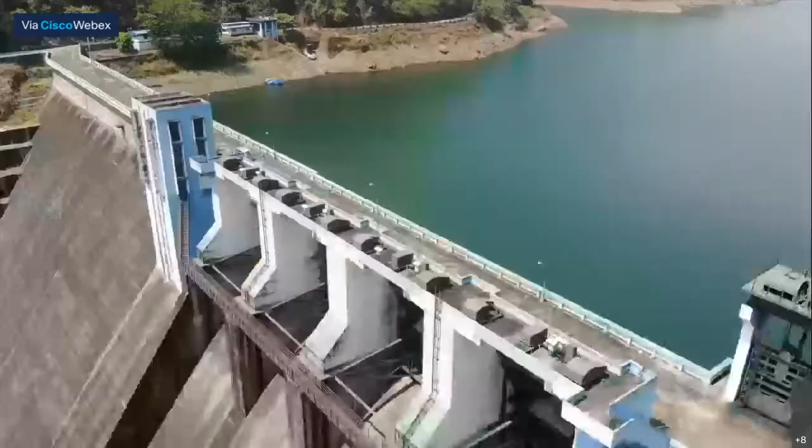In current times, the major challenges being faced by our water infrastructure include climate change, making floods and droughts more frequent and intense. Aging risks with existing water infrastructure now require an infusion of investment and legislation to address safety and reliability. A fundamental disconnect in current time is that society has been quick to privatize development gains and socialize development risks around dams.

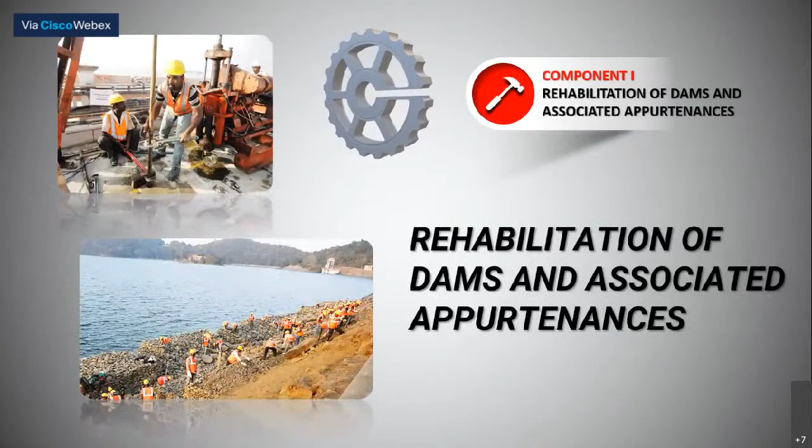The scheme has 3 components. The first component deals with rehabilitation of selected dams and its associated appurtenances. This component has almost 84% of project cost.

Dam Rehabilitation and Improvement Project is dedicated to improving our existing water assets, thus providing long-term water security to this country. This scheme will make resilient dams, resilient communities, and will address new challenges of climate change also, which may result in possibilities of extreme floods or droughts in the near future.

One of the key achievements of DRIP has been that 158 dams now have improved ability to safely pass the revised design flood.

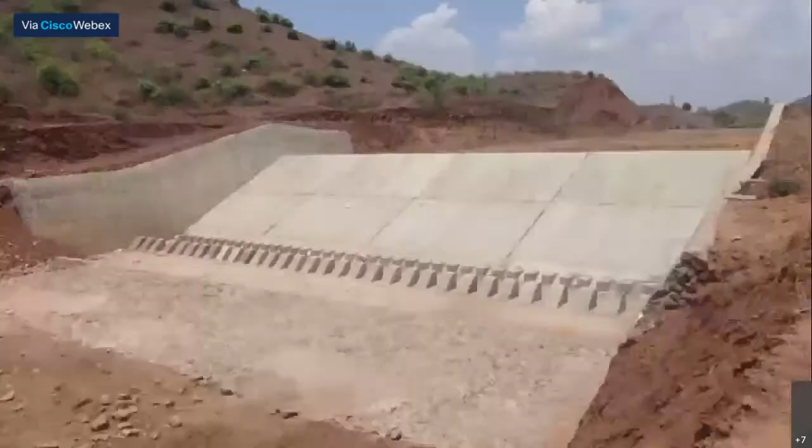The various measures undertaken to improve the ability of these dams to tide over the increase in design floods include construction of parapet walls, additional spillways and modification of existing spillways, flush bars, fuse plugs, repair of spillway glacis, and downstream energy dissipation arrangements. In the DRIP program, we have taken up pointing, reaming of the pore holes, restoration of the baffle wall in the stilling basin, and for safety and security, we have installed cameras, high mast lights, and constructed security rooms.

This DRIP scheme has helped to address dam safety issues to a large extent.

The operational safety of a dam is guided by man-made activities like operation of spillway gates, sluice gates, hoisting systems, by manual or automatic control systems with human interface. 128 dams have been strengthened in this area, including repair and replacement of spillway gates, under sluice gates, hoisting system, control system, and SCADA.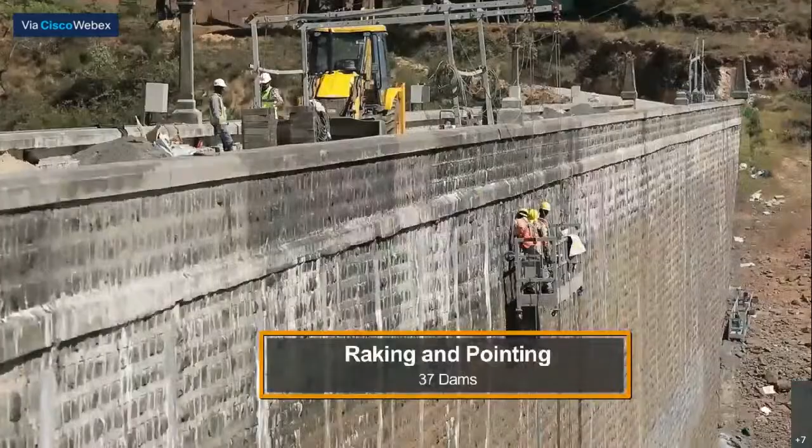Excessive seepage through a dam beyond a permissible limit may lead to water loss and undermine the safety of a given dam if not attended to in time. About 69 dams have been attended to with various seepage reduction measures, including application of geomembrane, grouting, improvement in foundation and cutoff, raking and pointing of upstream faces, and joint treatment using hydrophilic materials.

Some facts on the DRIP project, where I have been involved for more than two years: one is the exceptional work on capacity building, the appropriate way in which the risk framework has been adopted, plus an enormous and very remarkable work on diagnosis and rehabilitation projects.

All these together with reinforcing new legislations and best practices from all angles. And India is becoming a mirror for the world, as it is not only adapting but making good progress on best practices in dam safety.

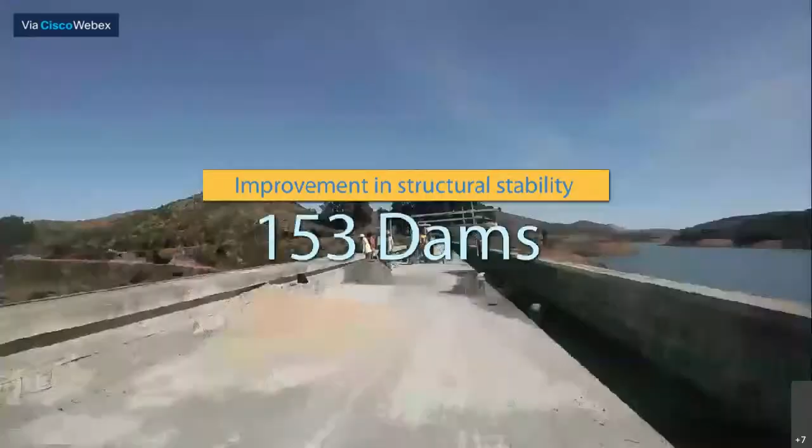Structural safety ensures that a given dam is safe in case subjected to extreme loading conditions. Under DRIP, 153 dams have been improved in this respect through various measures like rehabilitation of dam abutments, improvement of slopes and drainage, earth dam resectioning, reaming of porous and foundation drains, and strengthening dam sections by providing backing concrete.

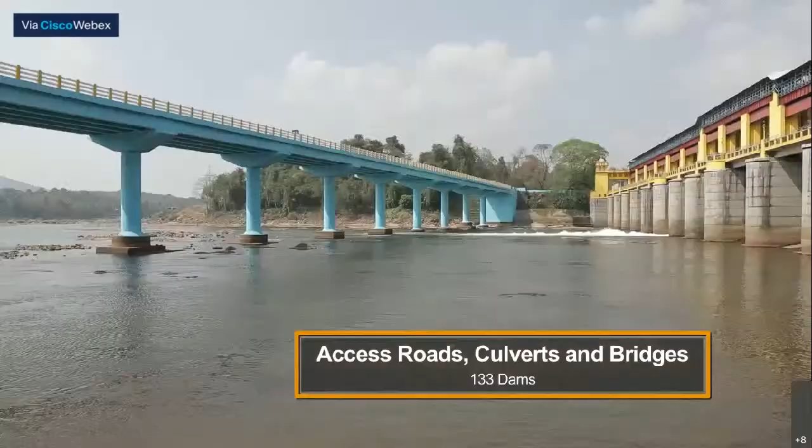Apart from major rehabilitation activities, the improvement of basic facilities is equally important from a disaster management perspective to ensure quick response during any emergency. These facilities have been improved for 165 dams, including dam access roads, culverts and bridges, external and internal lighting, standby generators, material testing facilities, control rooms, repair and improvement of dam safety offices, staff quarters and inspection houses, security arrangements, and training facilities.

Instrumentation and dam health monitoring is considered the backbone of comprehensive safety evaluation and health monitoring of dams. This helps in planning suitable rehabilitation measures at the appropriate time and prioritizing the allocation of limited financial resources. This information is vital for a risk-based decision system in dam safety. Instrumentation and monitoring systems have been proposed for 115 dams, with a 5-year post-installation warranty ensuring installed instruments work for a minimum of 5 years.

It's not just about safety in its narrow sense. It's really about how you invest in breaking an important cycle which we see all over the world, the cycle of build, decay, and rebuild. Can we break this paradigm and ensure that building is followed by intensive operation, management and support to turn an infrastructure asset into one that produces services for its citizens? We have to invest in the ability to build and manage. That's the commitment we have in DRIP.

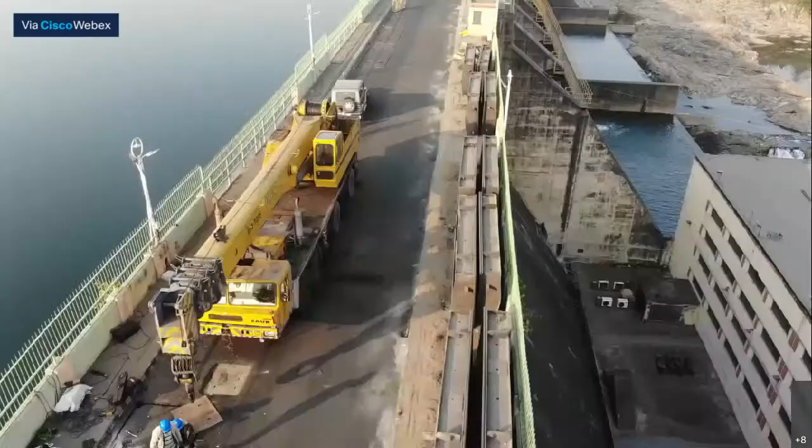Non-structural measures are equally important in mitigating risks associated with the dam. Two most important documents include preparation of the Emergency Action Plan and Operation and Maintenance Manual. These documents contain adequate operational and emergency flexibility to efficiently handle any emergency and smartly operate the reservoir over time. Central Water Commission has completed dam break analysis and inundation mapping for 222 dams and provided these to all partner agencies. Under DRIP, each dam has been equipped with these two important protocols.

With the introduction of the Dam Rehabilitation and Improvement Program, the World Bank supported program, this has changed the way we are looking at dam safety in the state. Through this DRIP program, there is now continuous training and capacity development of the engineers associated with dams.

Another important beginning includes dissemination and implementation of published emergency action plans through stakeholder consultation programs by inviting all stakeholders. This initiative of public consultations has been appreciated by all disaster management agencies at state and central levels, which is altogether a new beginning through this scheme.

Without water, we cannot survive. So studies like these and the efforts being made matter, because unless we all come together, work together, strive together, we will continue to turn rainfalls into floods.

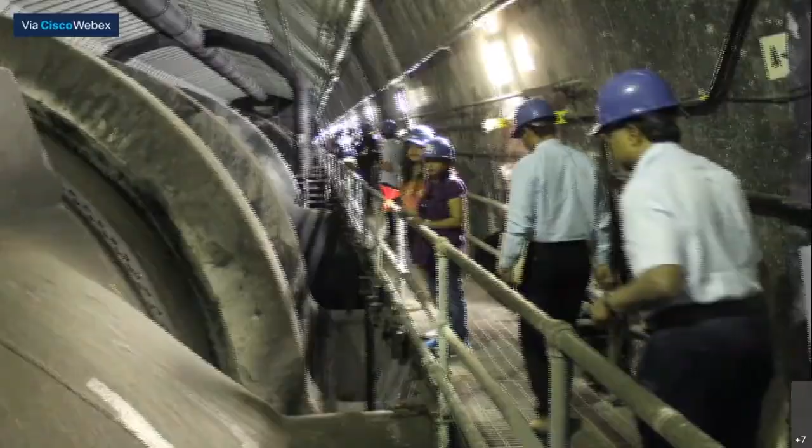This includes customized national and international training programs. About 179 national programs have been conducted, wherein about 5,200 officials have been trained, in addition to 5 international training programs. Capacity building of 8 academic institutions, and also capacity building of 2 central institutions, CSMRS and CWPRS, had also been done.

All these institutions have been strengthened through latest laboratory instruments, equipment, advanced modeling software, as well as exposure to field problems. We are very grateful to the DRIP project that we were able to develop several of our laboratories and other technical support like software, etc., with the help of DRIP projects in almost all the major departments of the institute. This is the foundation for creating a pool of trained dam safety professionals to handle various challenges in coming time.

To meet the long-term need of trained professionals in the country, a postgraduate MTech course in dam engineering has been started by IIT Roorkee, IISc Bengaluru, and IIT Madras.

The standardization and publication of technical guidelines and manuals is an overarching pillar in dam safety. Under DRIP, 14 guidelines and manuals have been published. These documents will assist Indian dam owners to initiate advance action for various important activities envisaged in the proposed dam safety bill. To ensure global acceptability, leading national and international experts were associated.

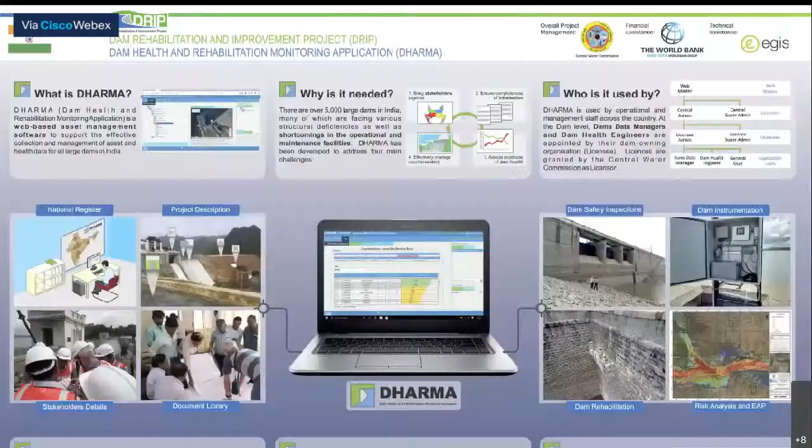During DRIP implementation, official collaborations with various leading global institutions like Deltares Netherlands, United States Bureau of Reclamation, Japan Water Agency, Entura Australia, Polytechnic University of Valencia, and Spancold Spain, to address long-term sustainable management of existing water infrastructure. A web-based tool called Dam Health and Rehabilitation Monitoring Application, or DHARMA, has been developed to manage dam assets systematically.

Project like DRIP is not so much important from the point of view of physical rehabilitation of dams, but the other benefits of these kind of schemes are what it brings in. Mention was made of all kinds of guidelines, all kinds of manuals which has been created, software like DHARMA to know the health of a dam which has been created, and the emergency action plans which are being prepared. Construction supervision and quality assurance are supposed to be the backbone of any infrastructure project.

The third-party construction supervision and quality assurance was entrusted to Central Water Commission. Through CPMU consultant, CWC conducted more than 1,000 CS and QA visits, including more than 600 construction material samplings during scheme implementation. The appropriate corrective actions were suggested to all partners.

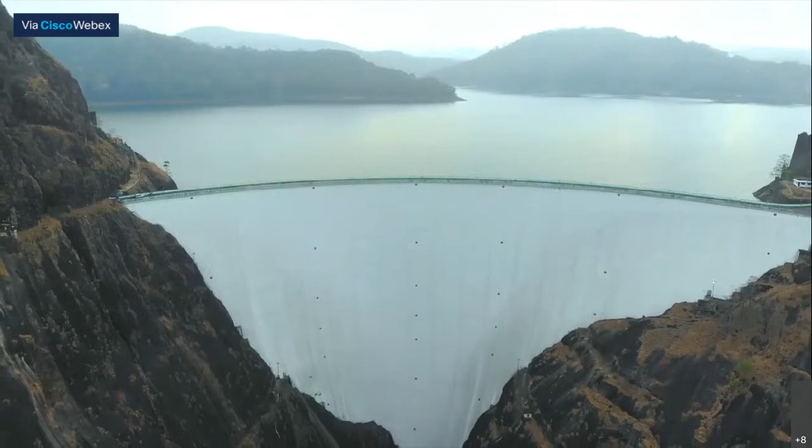The third component is project management. Monitoring mechanism was very robust. The National Level Steering Committee, headed by Secretary, Department of WR, RD and GR, and concerned state principal secretaries are its official members. This committee focused mainly about policy-related matters.

The Technical Committee, headed by Member, Design and Research, Central Water Commission, with appropriate representation from partner agencies, dealt with technical matters related to this scheme. Third one is World Bank Implementation and Support Review Mission, to review the scheme independently and evaluate the performance rating. This mechanism has steered the scheme very successfully to achieve the intended objectives.

In order to manage flow of huge information systematically, a management information system was put in place right from the beginning with weekly update. This MIS is a resource bank for all the partner agencies to monitor the scheme systematically and retrieve any information. In addition, various overarching pillars of any system, legislation is considered one of the most important.

Current government has given much needed importance to this pillar. India has been embarking in a very strong program in terms of rehabilitating the dams in order to ensure safety. It would be very good for the country if the Dam Safety Bill would be enacted very quickly. Dam Safety Bill 2019 has been passed by Lok Sabha in August 2019. The proposed legislation is very comprehensive and have adequate provisions to ensure health and mitigate risks associated with dams.

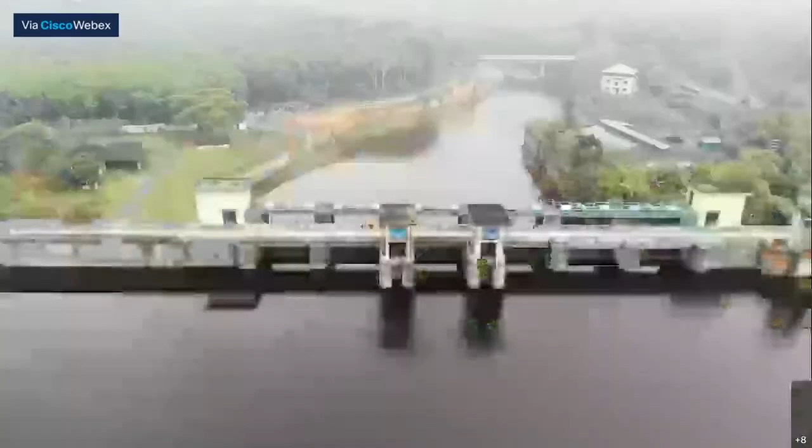This legislation will ensure sound construction, safe operation, and sustained services from existing water infrastructure and will safeguard downstream communities while enabling economic development. The enabling legal framework for dam safety assurance will serve to establish minimum standards, along with duties, roles, and responsibilities for assuring the safe development and operation of dams.

Based on the success of DRIP Phase 1, the Union Cabinet approved a new scheme, DRIP Phase 2 and Phase 3. This new scheme has 19 states and 3 central agencies on board with pan-India participation by dam owners.

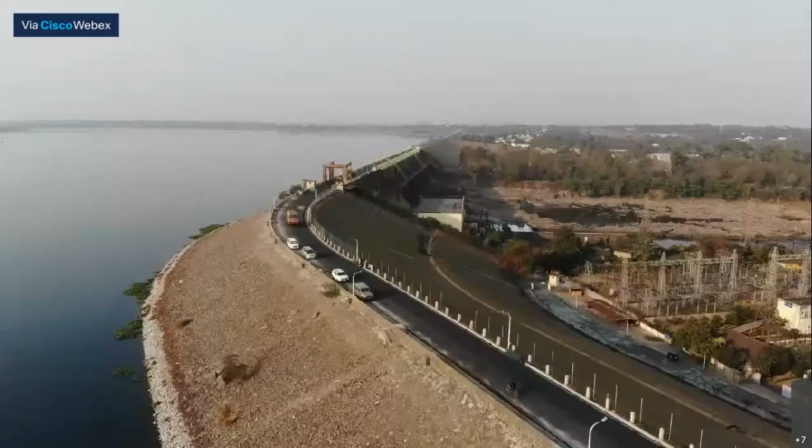DRIP is going to prove a great rescuer for our Indian dam owners in many respects, especially in enhancing the institutional strengthening of various partners. Ministry of Jal Shakti and Central Water Commission acknowledge the valuable support provided by all official partners and other stakeholders of the scheme and would like to take pleasure and pride in working together during the next scheme for better dams for a better tomorrow of India.

Jai Hind, Jai Bharat.